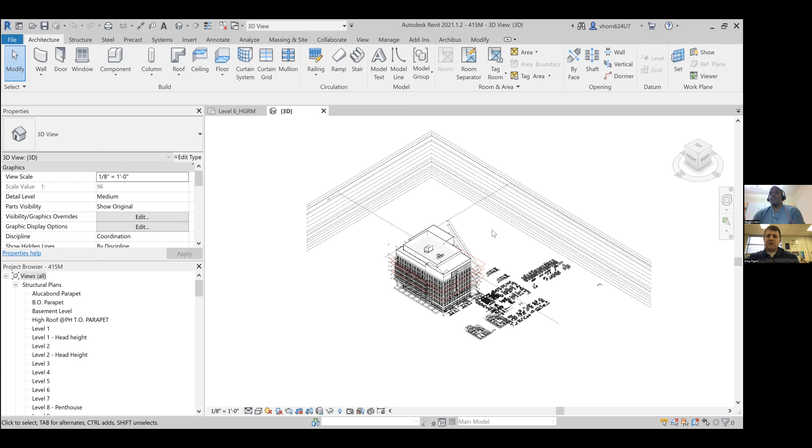But this one I actually built from scratch. It's the entire building of 415 Main Street. So all of these components that show and represent the building, I had to make those.

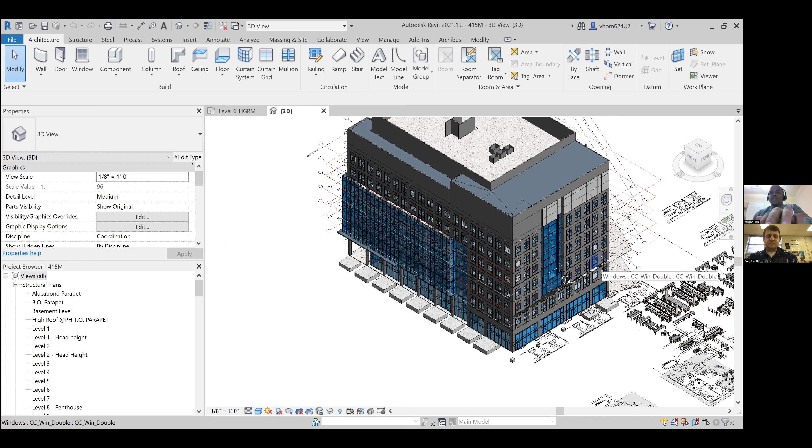And including, I pulled some of these out to the side for your students to see. You can kind of see all of this in the building is important to get right, because say if this is Greg's office here that I'm highlighting, and he needs something as simple as a new desk, the dimensions need to be right.

If you want the entire floor for yourself and you say, well, I'm hiring 40 people and we're all doing experiments on, say, rats or something like that, you need all of these things that go with that on that floor, and it has to be exact, because it needs to be ventilated, it needs to be well lit, it needs all of those conditions.

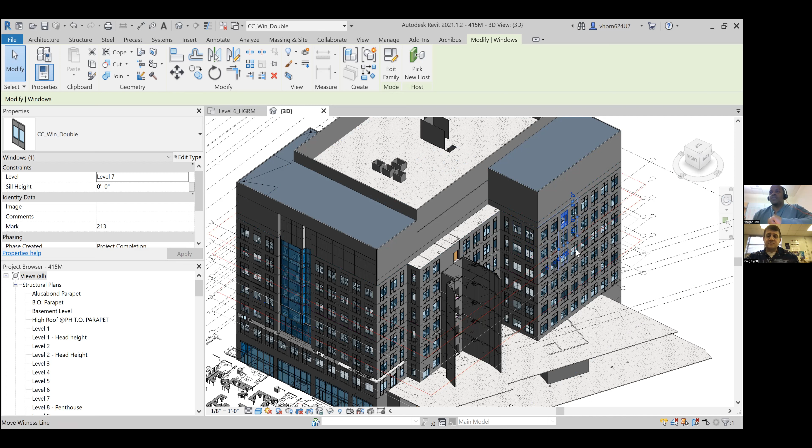And that's where something like Revit allows multiple disciplines to talk to each other at the same time in what's called the Revit model. And this is all part of building information modeling.

And another piece here shows some AutoCAD that I had brought in at 2 dimensions that shows a desk and a chair. And I'll show it from sort of a top view. Hopefully I'm not sure how it looks on your end.

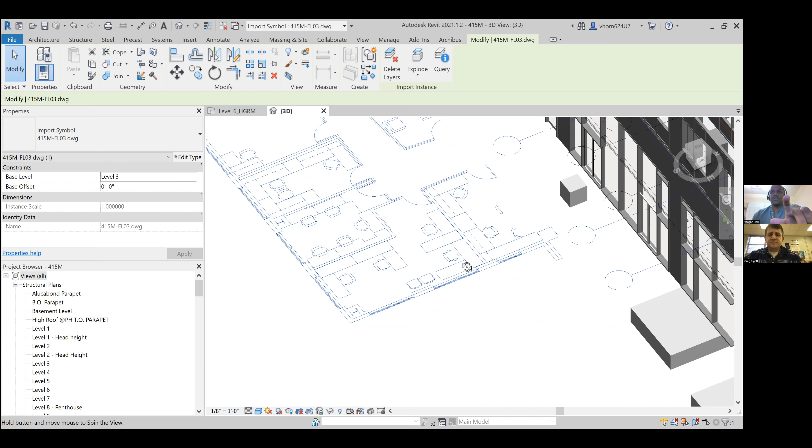But in this 3D view, you can see here's what a floor plan of an office looks like.

These sorts of things we have to draw and deal with all of the time. So I think I kind of have it centered. So you can see there's 3 people in this office that have 3 different desks, right?

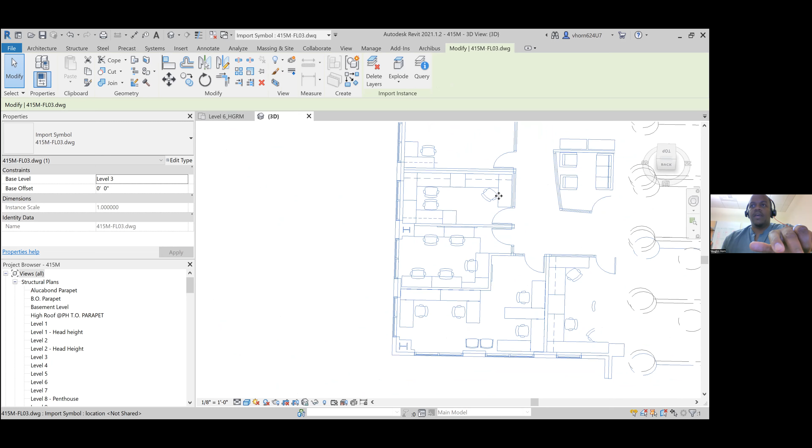And that's in AutoCAD. And then in Revit, in order for it to make sense in the Revit model, which reads 3-dimensional components, you actually have to build these. So these are real chairs that I had to design and model myself.

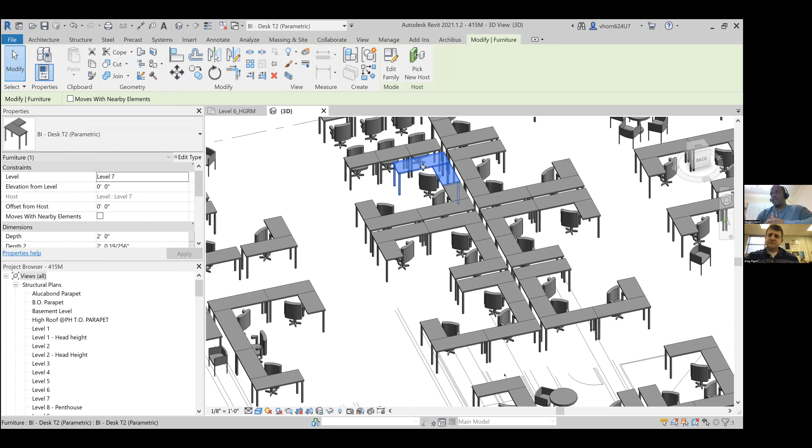When I say the word model, 3D modeling is an entire sort of sub-discipline within building information modeling, which some of it you can do in AutoCAD, but it's important because these represent real desks.

And even though they're showing up as sort of gray on the screen, you can go into a lot of detail. You can go into the detail of like where the drawers are, what the finish is. Is it maple? Is it oak? Is it metal? Where is the metal? Where do the screws go?

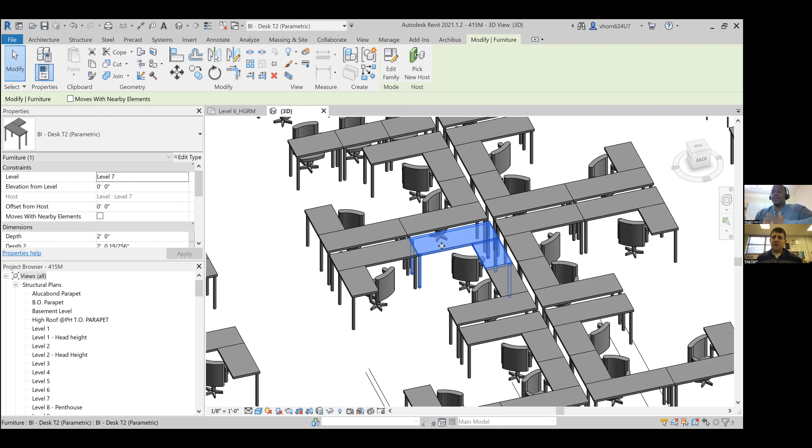And when you start moving things around in offices, you can't just do that without having this basis. And the basis or the source of truth in a Revit model is very important.

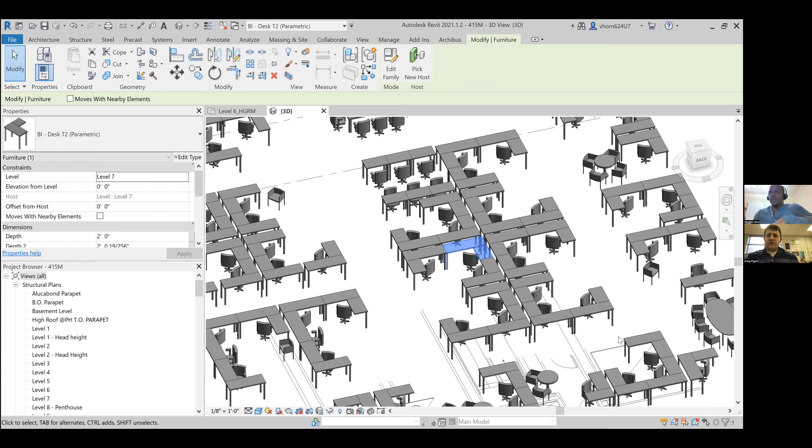Sure. The importance of cross communication is clear when you have something like an entire floor being renovated. This software I'm using is called Bluebeam. If you're familiar with Adobe Acrobat that reads PDFs, Bluebeam is similar, but specific to architecture and construction related fields.

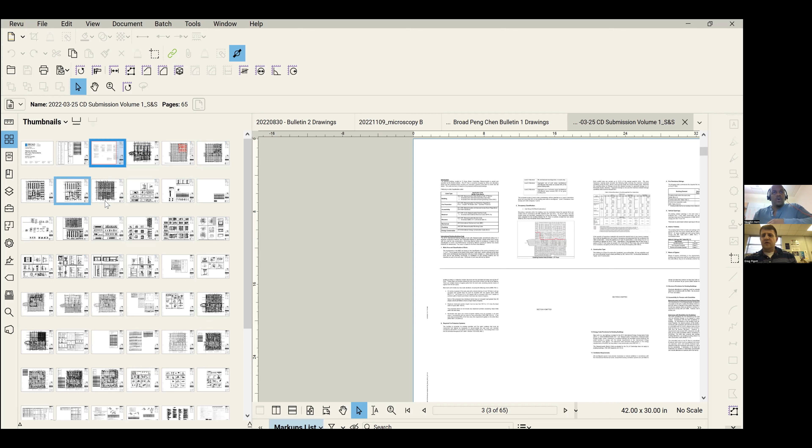This shows a sequence of drawings generated in Revit but shown two-dimensionally. I can pull up a couple of the floor plans. As you can see here on the left, these show all of the different floor plans from all of the different trades. I'll give you a glimpse of the lab plan.

What's shown here is called an enlarged plan. It shows at a scale, which gives you a reference of how big an object is relative to another. If this object is a door, a door is about 3 feet, maybe 3'6" wide. You know that this, what's called the flex lab, is significantly bigger than your door. The door symbol is shown here with the dashed line that indicates the door swing.

These sorts of things are very important. Every single line in a CAD drawing, whether AutoCAD or Revit or otherwise, has a meaning. They all communicate so that when you are actually building this stuff, the person installing it knows how big it is and where it goes.

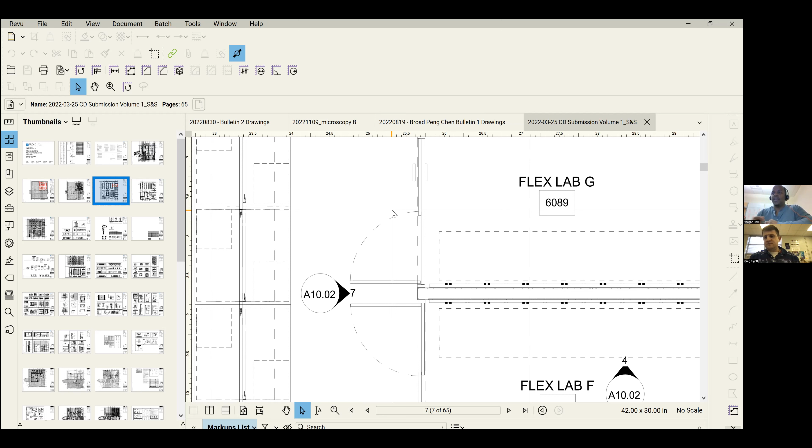And when you're ordering this stuff, say from a door manufacturer, they know how big to make it because they're making it at their own shop, in some big warehouse. They make it according to the specs you give them, and ship it to the location. Then an installer has to install it, hopefully without having to modify it once it lands. If it's precise and accurate, it'll all work out.

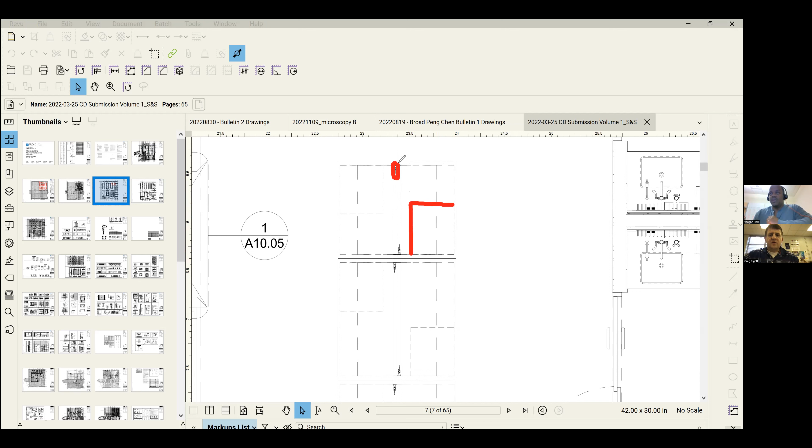So what's shown here, for everyone's reference, these are all symbols, but they represent real objects that have to be ordered and are now being installed. What's called a bench, or lab bench, is shown in these rectangles, and these dashed lines all have meanings. The ones I'm highlighting or circling now indicate where the drawers underneath the bench belong. And these lines here in the middle show where the gases are run.

So if you're in like Mr. Johnson's physics class down the hall, and you're trying to plug in a Bunsen burner, the Bunsen burner runs on gas, and it needed to be placed at some point in someone's architectural drawing so that it was in the right place, so you could sit down and do your science experiment. Same sort of logic here.

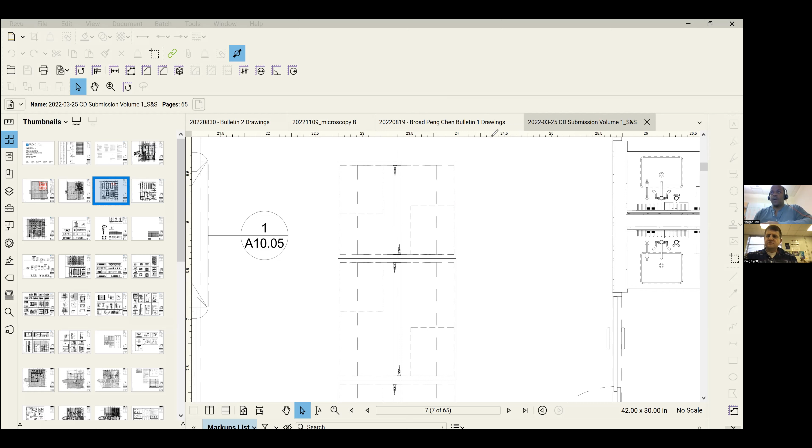Your students are probably familiar with symbols such as a sink. This is a lab sink. It shows up in Revit, actually drawn in 3 dimensions, but you're looking at the top view from the plan. So this is the top view showing the drain, and that's the faucet. This is the emergency eye wash, and this is the sink.

And all of these have components, pieces to them, that are based on manufacturer specification. It all goes into a CAD drawing, whether AutoCAD or Revit.

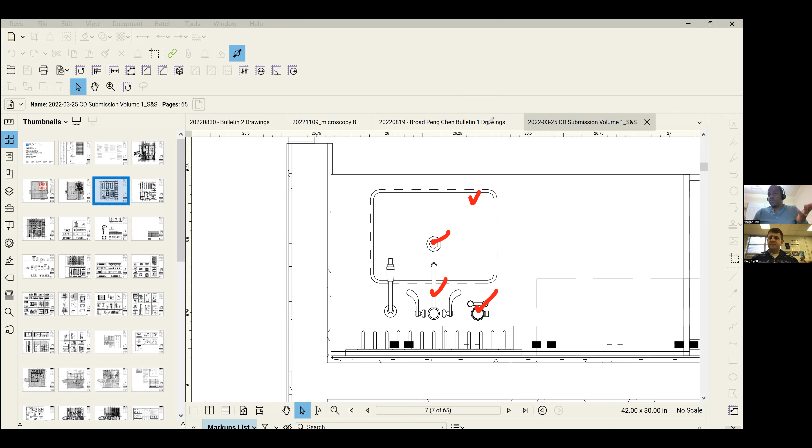Now, what starts to happen is, like what's happening right now, right before our call started, I was working on one of these microscope rooms. The scientist moving into the microscope room has an idea. He wants to bring in a very specific high-powered laser microscope, but it requires something to be suspended from the ceiling to house some of his equipment.

Now, construction is pretty far along, and he gave us this recommendation just last week. So you can imagine all of the trades, the mechanical, electrical, plumbing engineers, have been in and out of this building for a few months and are close to done. It's November, and this is supposed to open around New Year's Eve. So what we had to do was try this new design, a design exercise if you will, to figure out if it's going to fit.

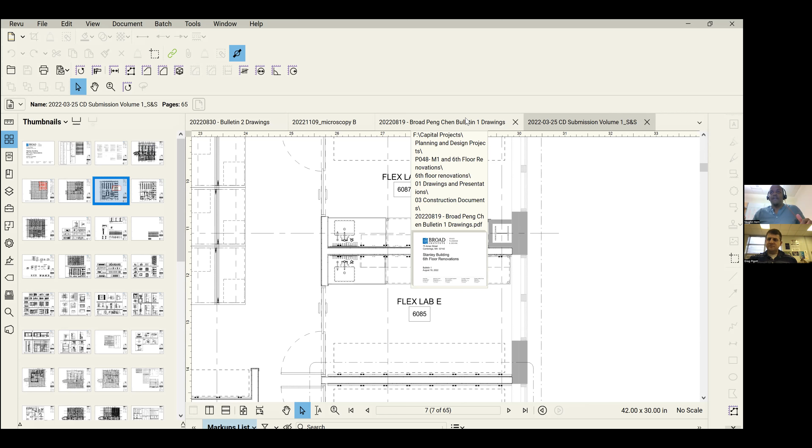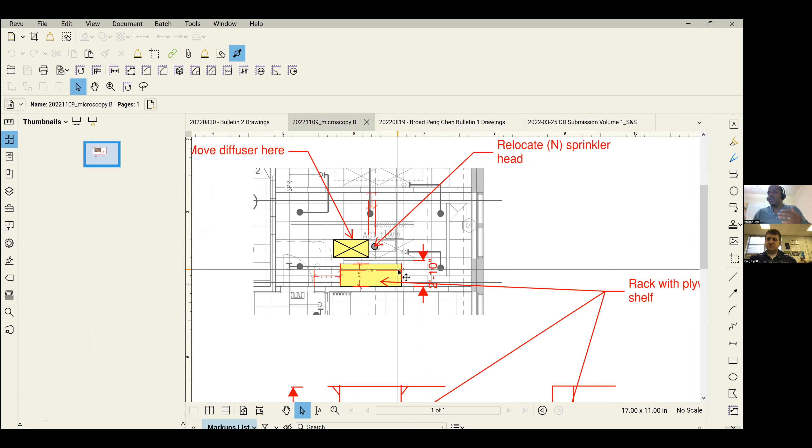So what I've been working on is taking an AutoCAD drawing and trying to figure out where this rack would go in the room. I needed a CAD drawing to understand that, because I also needed to go to the construction site and figure out where that corresponds to where it's drawn.

In this plan, it shows these symbols in CAD for sprinkler heads. We're all familiar with those. We need those - that's the fire suppression system.

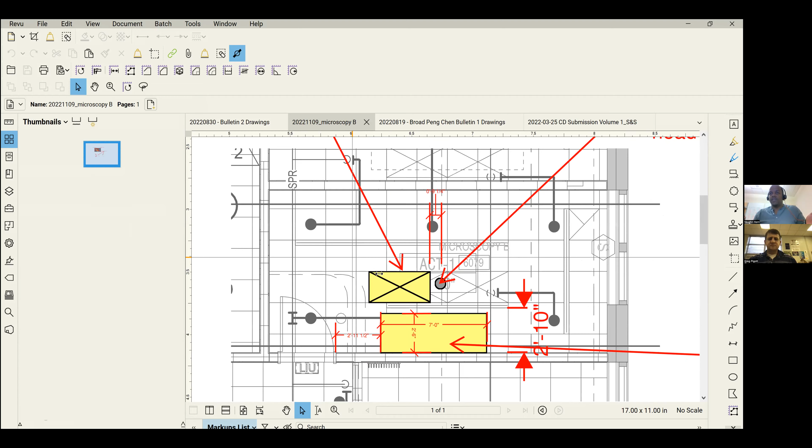These symbols are for what they call diffusers. That's for AC. Imagine life without AC. Imagine that in a lab room with a very hot laser and equipment connected to it that also runs pretty hot. You need AC.

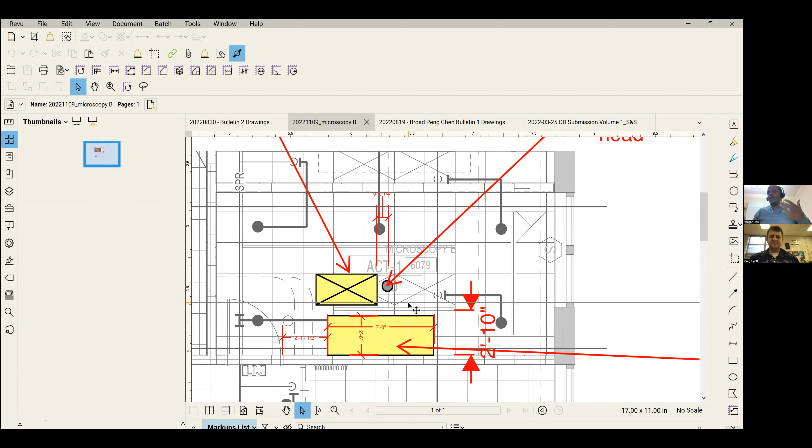But what the scientists didn't understand was that there's all these different things to consider. If I were to take off - these are different layers here that I created on the side - a mechanical engineer, this is where they get down. They start seeing, oh, we are running all sorts of ductwork in the ceiling, and these symbols all represent ducts.

So these are real pieces of equipment that are heavy and big, and you can't just move them around. So if someone comes to you and says let me hang something, suspend something from the ceiling, you have to say wait now, there's a lot here. So the first thing you do is go back to the drawings, which are drawn in some sort of CAD version, either AutoCAD or Revit.

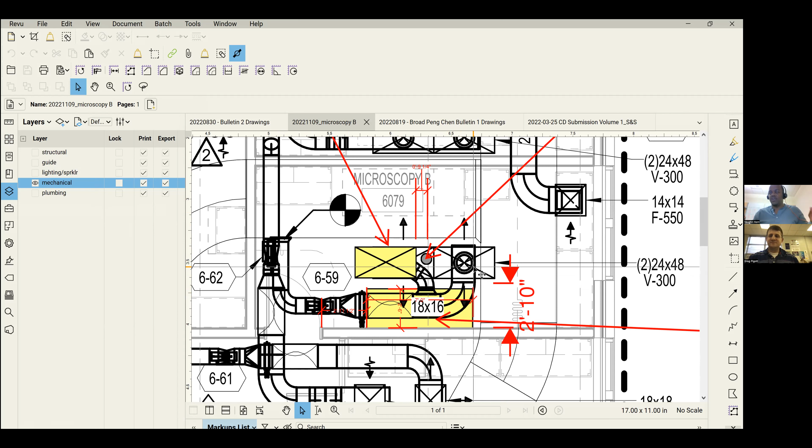What we found was that some of these large ducts are very big and they're running right through the space. So he has a very confined footprint for something suspended from the ceiling.

And then a plumbing engineer, they would draw what goes into that room from their perspective, which is all wastewater pipes, cold water pipes, drainage pipes, all of those things, high pressured air. That all serves laboratory functions, and that needs to be drawn in an AutoCAD drawing.

So I had to, what they call, overlay all these different drawings so that I could help the contractor, the builder, understand you have a very narrow footprint to work with to satisfy the scientist's request. And in order to do that, it has to avoid colliding with everything else that's already being built - all the pipes, all the ducts, and the light fixtures.

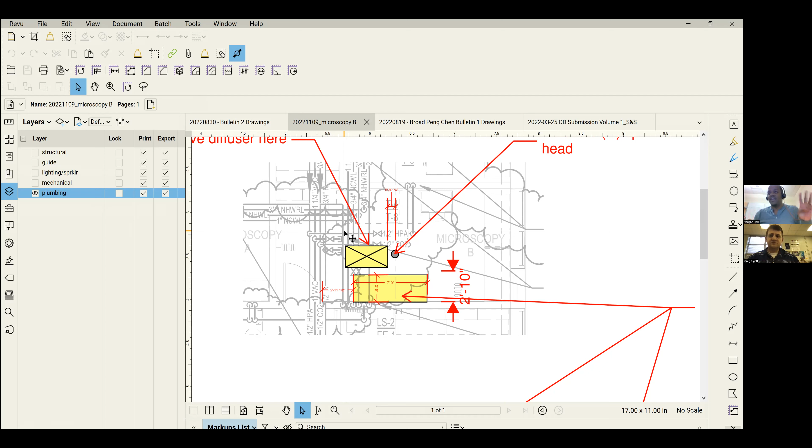And yeah, without CAD or some version of CAD, there's no way that I'm able to communicate this. It's fundamental to this.

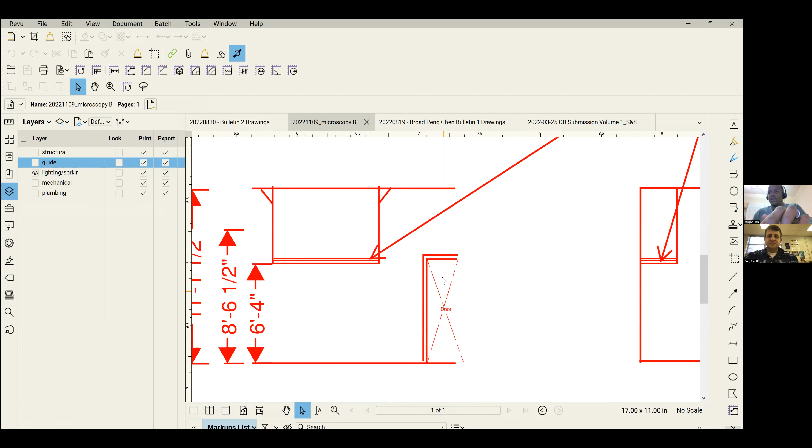So it helps me understand, like if I were to draw it from the front - here's the door, and a person would be, say, about this tall. Say a 6-foot person, or maybe someone slightly shorter, would be about this tall for scale.

So you have to understand that whatever the scientist might want has to be far enough from the door that it makes sense, far enough below all of the ductwork running in the ceiling, and it has to be tall enough so it doesn't hit someone's head if they walk right past.

And then also there's building code laws that vary from state to state - whether they want it or not, a building of certain types has to have certain codes to be within the law in the Commonwealth of Massachusetts.

And one that's universal is that anything for head height, if you will, is 6'8". Any person walking underneath an obstruction that's beyond 4 inches from a wall, if it sticks out 3 feet, needs to be at least 6'8" to be cleared.

Now, if you have someone that is 6'8", that's the exception and not the rule. Most people are shorter than that and can clear that without having to duck their head.

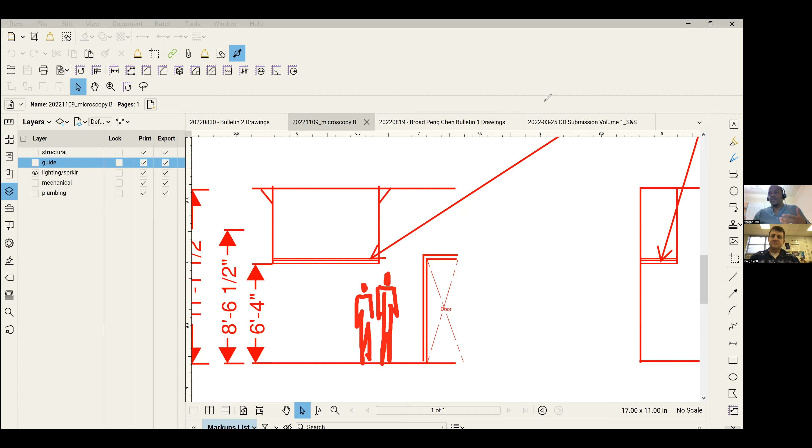So there's things like that for every line that you have in a drawing, it represents something real, and it has real considerations.

That's incredible. Yeah, so I didn't want to go too deep into that so as not to bore everyone, but that was kind of really cool, that example. That was really cool.

Now, before I get to the students' questions, I'd like to know, how often do these software programs update? Because obviously, anybody in a technical field, you're constantly learning new things. So how often do these update, and you have to stay on top of this?

Yeah, thankfully, Autodesk is on an annual basis. So once a year, you will see - actually looking ahead, there's already the 2023 version of AutoCAD and Revit. The things you have to be mindful of is for every update, there's subtleties, there's nuances that are meant to improve the program. Even for Bluebeam, that I was using to show you guys those drawings, that even is updated regularly.

But for these major updates for AutoCAD and for Revit, they'll give you what they call release notes, and the notes will tell you what's different. And sometimes it helps, and sometimes it's not so helpful.

I know, like in the Adobe programs, when there was an update to Adobe InDesign or Photoshop a couple of years ago, it actually made my life a little bit harder because it took away a shortcut that I used to use all the time. Not sure why they did it, but someone above my pay grade makes those decisions and sends it out to everyone. Software people are a different breed.